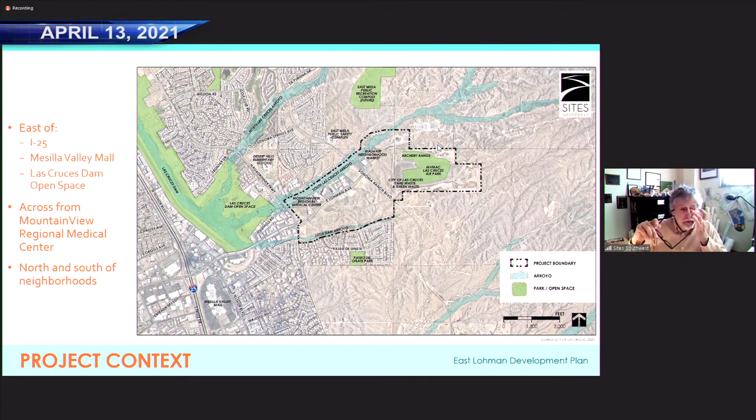We also took that we were going to be providing a buffer from existing communities in our land planning, and that along with the mix of residential uses, we'll also provide a mixed use in the entire area for not just residential uses, but other land uses such as retail, commercial, and health-related improvements.

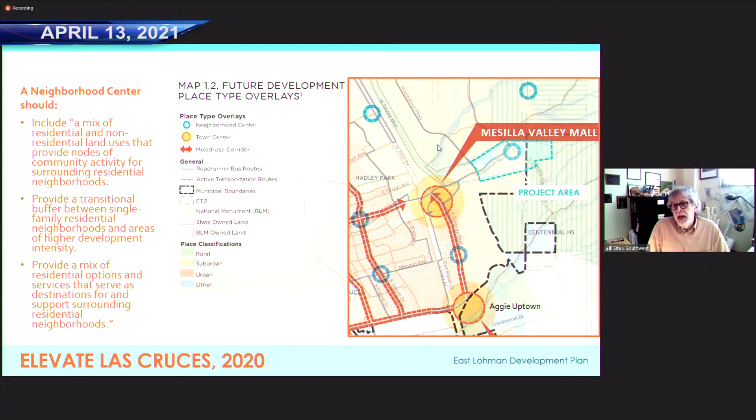And it creates a real live, work, and shop environment with a mix of land uses. We've also taken that to heart as well in our planning.

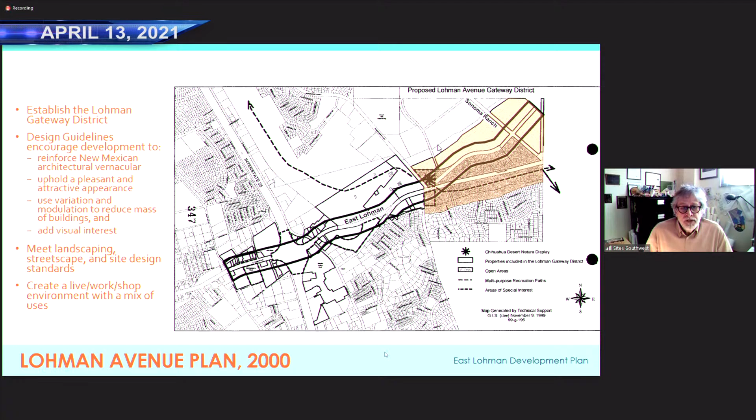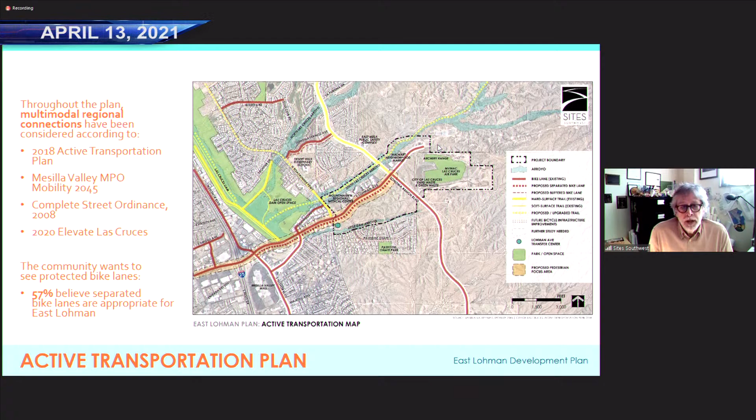Another thing we took from the active transportation planning that the city has already done is that 57% of the people appreciate bike lanes and want bike lanes on East Lohman. So we took that to heart as well in our planning efforts.

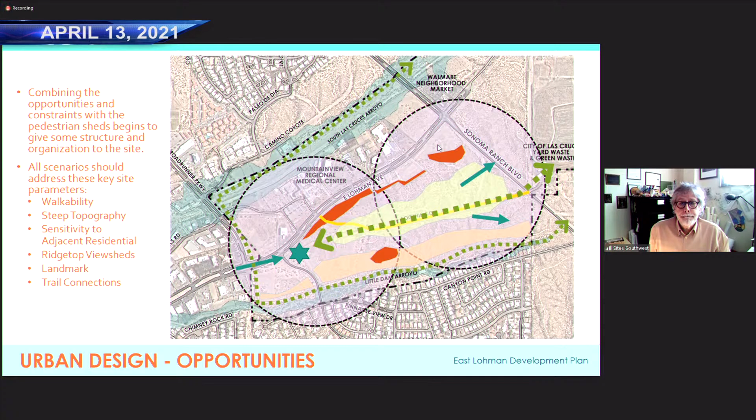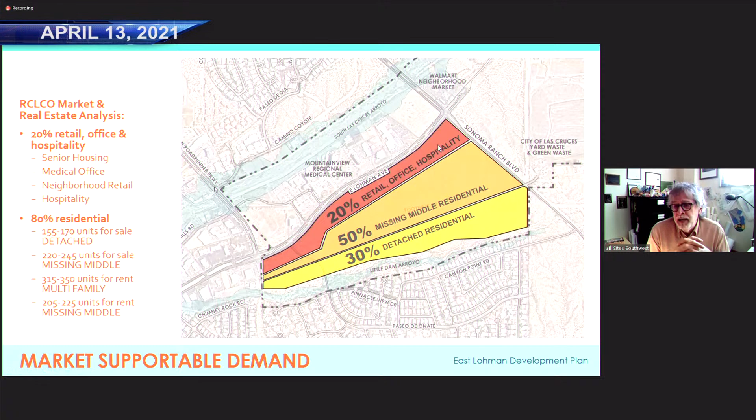So now I'm going to turn it over to Danny, and she is going to describe the community engagement that we've had so far on the project. Danny? Yeah, thank you, George.

Appreciate that. So in addition to conducting these analyses— excuse me, Danny, I know he introduced you, but can you just state your name? You just need to say your name, you don't have to say who you're with, just your name. By all means, I'm Danny Wilson.

It is really a joy to be here this afternoon presenting this plan, and really excited to build on what we've already engaged, which I'll summarize briefly here. We wanted to make sure that the East Lohman plan is a plan that is for and by the community, and that their goals and needs are really embedded into the outcome that you'll see today.

To summarize some of those pieces of engagement so far: back in August, we had several stakeholder meetings with key folks from the area, including businesses and realtors, developers, economic development representatives, and neighbors. This culminated, after we conducted the existing conditions analysis, with a work session held with City Council in November.

Building on this, it segued nicely into a community charrette that we held in December over the course of 3 days, finalized with 3 shared plans on the 4th day in January. Also happening concurrently, we launched our project website, planeastlohman.com, where we share regular updates with the public about plan development and ways folks could engage. As we move further along in the process, we'll share updated plans there as well.

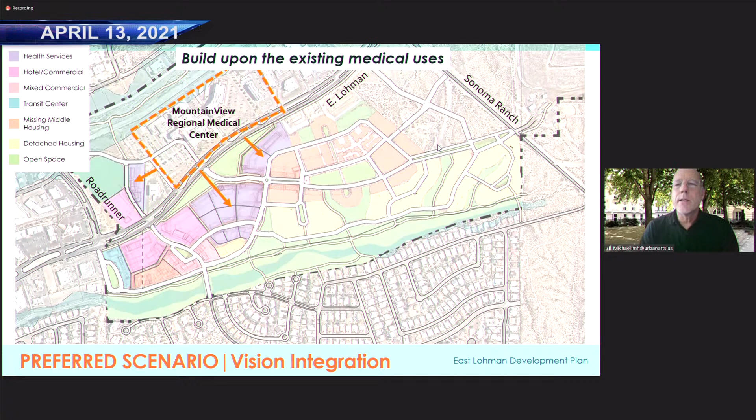Next. We've really focused on housing options, the missing middle and some detached residential, thinking that the higher density housing could go on top of the ridge or the mesa, if you will, and then we would transition to smaller scale as we move towards the neighborhood to the south.

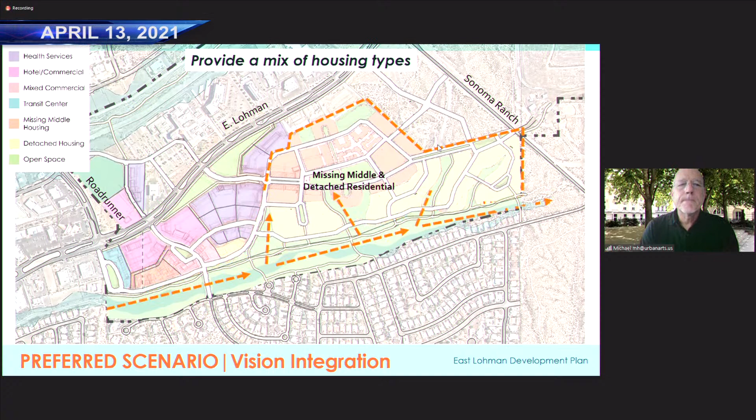Next. And then incorporating the natural environment, so utilizing the arroyo and extending it up into the plan was very important. And you'll see that we've sketched in some trail networks that can be used. So you could actually be on a bike in the arroyo and bike or walk right into the neighborhood and connect through it.

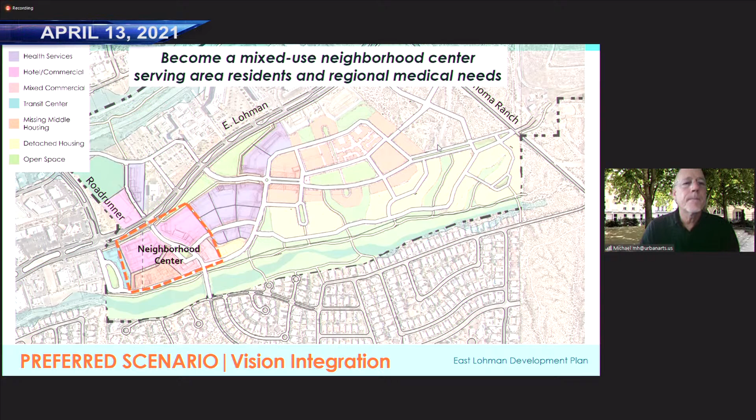Moving up to the east and north, you'll see again the medical uses there. And we also had in some of the other plans this idea of a terraced gateway, which we think is really important. Instead of cutting into the hillside, we're proposing a nice landscaped entrance drive that would go up to the top of the hill, with most of the development sitting up there, looking down on Lohman, which I think would be really nice.

So we don't think there's enough retail to do blocks and blocks of mixed use intensive development. But we're thinking if we could get one really nice urban block that maybe has some sandwich places and restaurants on the ground floor and something else above, that would be really nice, and it hooks into the green space.

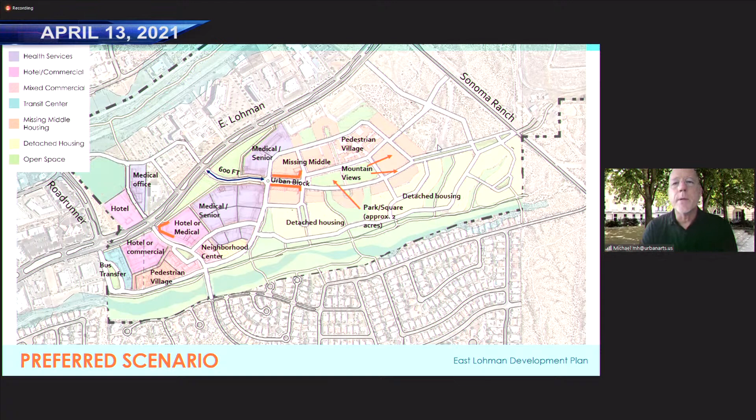Some mixed use or mixed commercial. We really concentrated the commercial down on Oñate and the corner of Oñate and Lohman, but there's also potential at the large site up at the northeast corner that could have some of this commercial activity. Again, the transit center is there. The missing middle housing and the detached housing are in the orange and yellow, and of course plenty of open space to tie it all together.

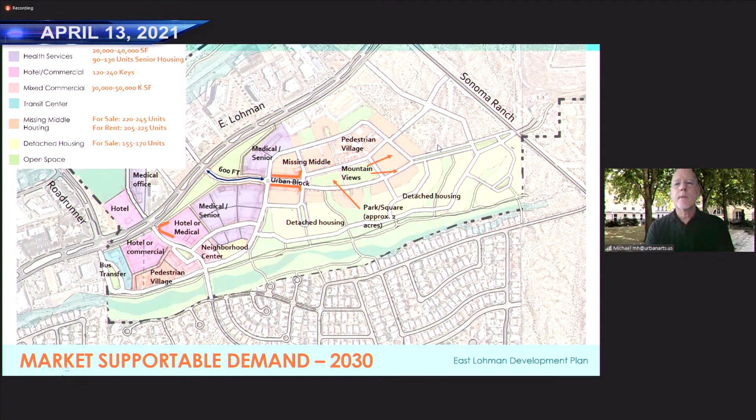If you remember the 9 big ideas, we had 3 big ideas per plan, and since everybody liked all of those ideas, we were tasked with combining those 9 into this plan. I think we've done a pretty good job of taking the ideas that people liked and finding a place for them in this new plan. Everything from the neighborhood center to the terraced entry to the focus on health and missing middle, all of those elements we can incorporate into this final version.

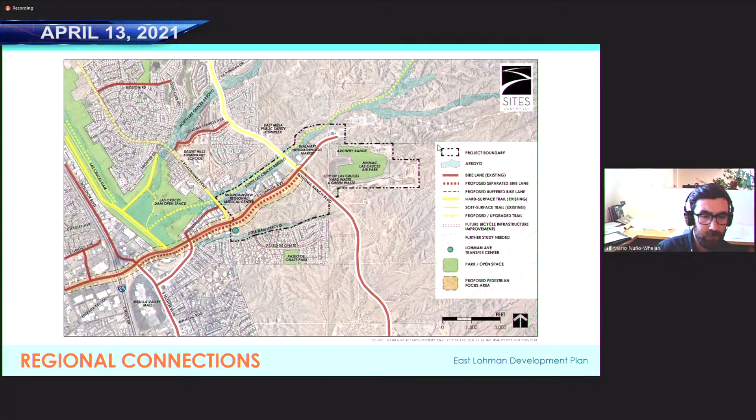Zooming in, this shows an overlay of the street network and the active transportation network we're envisioning for the East Lohman area. Along East Lohman you'd have separated bike lanes, and coming along Paseo de Oñate, which goes down into the Canyon Point community, proposed bike lanes along there, and then that central corridor running right through the site also having bike lanes.

This can be a range of options, from very naturalistic bike path type trails along the arroyo to the south, using the existing arroyos as open space, and providing trail networks that really connect both the community to the south and residents and users within the East Lohman area to the central and commercial corridors.

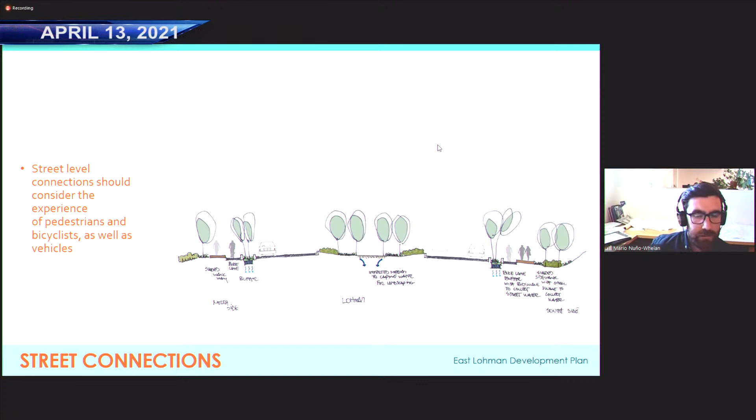This builds on a growing trend of folks having a growing appetite for transit and alternative transportation options, and maybe less attachment to personal cars and needing to drive everywhere — thinking about autonomous vehicles and small shuttles within the site, as well as e-scooters, shared bikes, and e-bikes.

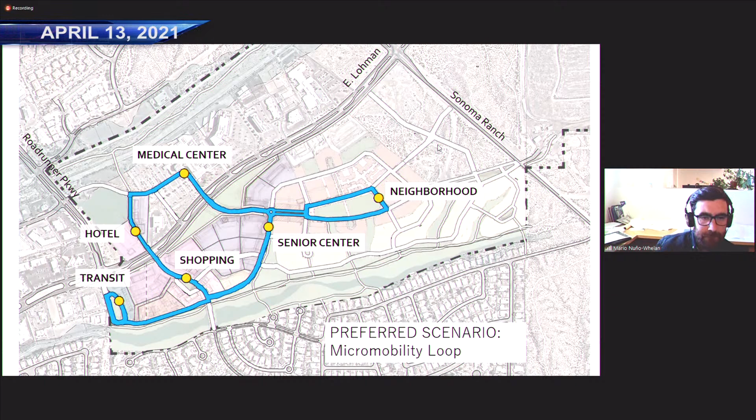The idea with this is the micro mobility loops can expand as development expands within the site. So as things move northward, or as the plan grows, extending that loop to include Walmart and the medical offices north and east of the existing medical center, and future shopping areas along Sonoma Ranch.

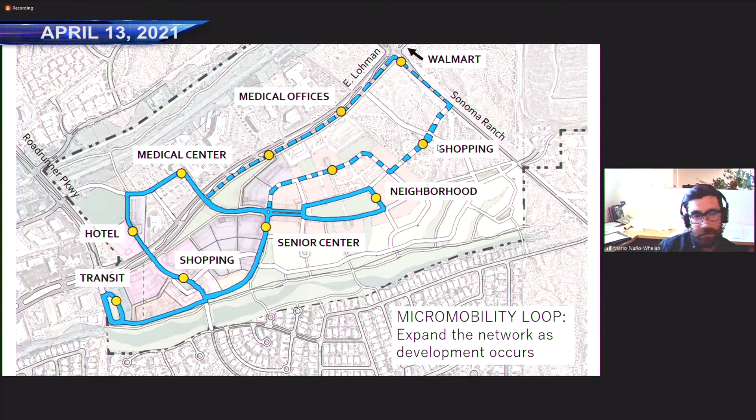Lastly, I wanted to highlight the layer of open space areas in the plan. Going through the different draft scenarios and getting feedback, a lot of people really liked having density on one hand, but loved what the conservation plan did in terms of building around existing drainages and preserving the healthy landscapes. We tried to cluster the detached housing around these arroyos and build communities that responded to that, allowing trail networks to go in there.

You can see the largest arroyo down to the south, and various green spaces using the smaller drainages that come down from Foothills Drive, the central gathering park of the mixed use area. Folks really responded to the terraced entry and using that as a mix of green spaces - this could be pocket parks or small gathering areas that medical center staff and visitors could use. The last one is the existing drainage basin that runs along Roadrunner, taking that further into a shared green space.

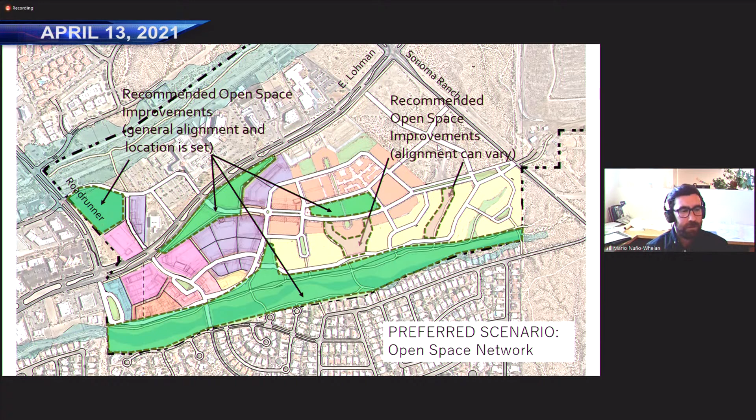And I will hand it over to Jay.

Thanks, Mario. My name is Jay Narayana. I'm going to be presenting the zoning framework. We have this great vision for this development on East Lohman. A lot of the property is owned by the city, so the city does have some control, but we don't want this vision to just remain on the shelf. We want to make sure it can be implemented through a zoning framework based on leveraging the market potential, allowing flexibility, but balancing the need for predictability, because as the city sells or disposes of property, you want everyone playing from the same blueprint, with value added for everyone building on an overall vision.

A lot of what you have around here is very familiar - it's what's on the left, where buildings are set back and parking is in front along the roadways. The vision we want to achieve is what's on the right, where buildings are closer to the street and parking is behind. So how do we get from what's on the left to the right? It's really about reframing how we look at zoning and the form of development that's implemented.

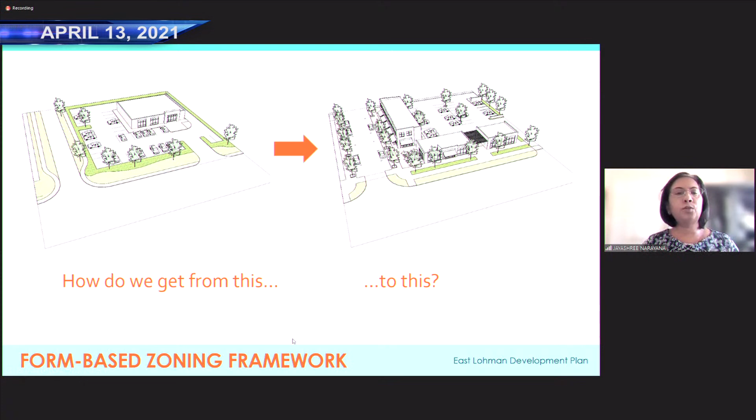On the left, you have single-use buildings set back with parking along the roadways - mainly auto-oriented. Think about East Lohman right now - it's fairly auto-oriented. If you're walking on Lohman, most people probably think your car broke down and you have no business walking on the roadway. We want to make it easier to walk and attract multiple modes - the great investment of the micromobility loop and the trails - the city has a big investment in this property and the need to realize the potential for many uses and make sure that's implemented.

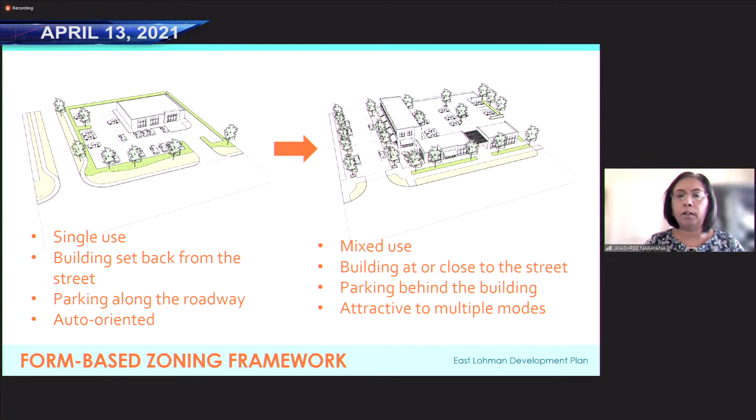The idea of zoning here is more of a form-based code type framework that establishes different character areas or zones with different forms. The whole East Lohman district is one district, but it's not a one-size-fits-all zoning tool. You have different nuances of use types and intensities of development based on where you are.

The neighborhood center may take a different feel, and the neighborhood with detached housing may look and feel different. We want to make sure there is street connectivity thought through, so that as development happens, you end up with a connected street and pedestrian network. There's a lot of detail in our vision, so we want to make sure that's translated through the zoning tool.

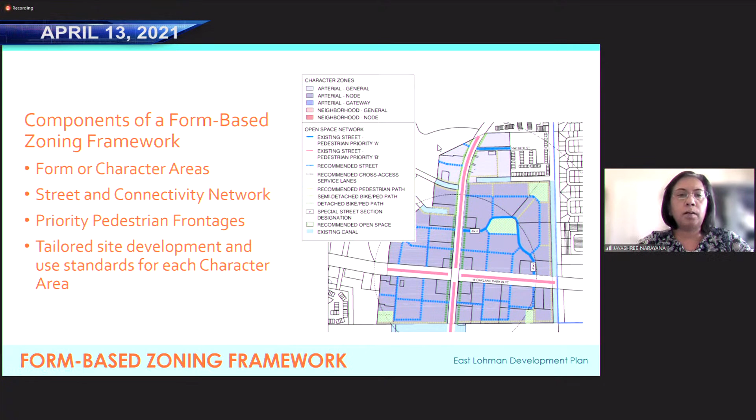This is the preferred scenario - think about how we'd go about creating the zoning framework for it. One area is the civic zone, which we're treating a bit differently because it's a unique use - a bus transfer station, which is a public use. We know there are special needs for circulation for the buses, and connectivity needed with the light at Roadrunner.

Then the Lohman Gateway. The reason we are identifying this as a different character area is because we want to make sure that the intensity of the development—maybe this is where we have the highest intensity, maybe 5-story because it's lower down on the hill. We want this intersection to create an interesting landmark for East Lohman, so people know they're in a special area. So you'd want a mix of uses, including hotel, commercial, health-related, mixed use, and residential.

So this would be the kinds of development we're envisioning. When you translate this into a zoning tool, we'd want the design standards to implement some version of this. It won't be exactly like this, but we want the elements here to be reflected.

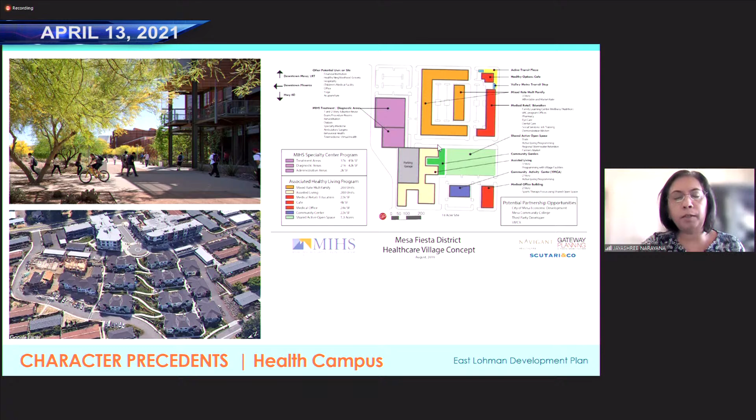Again, it could include some institutional uses, but also residential. These are some images of what that kind of development could look like.

It may be height standards for 3-story on top of the mesa, the highest point of the site, and then maybe smaller scale commercial development. When Mike described the idea of restaurants and a more urban block closer to the health campus, that may be a location where you focus ground floor commercial uses in your zoning. This could be the image of what that village neighborhood could look like—a mix of missing middle and commercial uses.

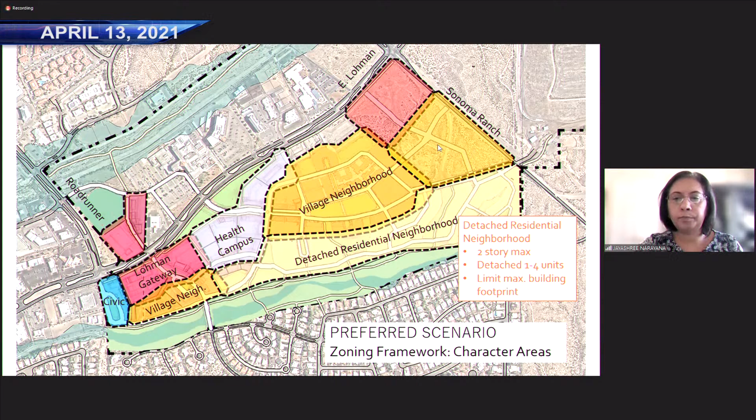And the last would be the detached residential neighborhood. The idea is to match the scale of the residential neighborhood, which is single family, but allow a little more gentle density—1 to 4 units, duplexes, triplexes—while still keeping with the scale of the neighborhood. Maybe 2-story maximum, some larger lots, some smaller lots, maybe accessory dwelling units, really having a mix that's more compatible with the neighborhood to the south. This would be the image of what the standards would implement.

With that, I'll hand it over to Mike to talk about the next steps. Thank you. That's me. Okay, next.

Michael Houston again. I think we have just two slides. What we did is, when talking about implementation, it helps to break out the plan into its two basic components. In urban planning, we think of the civic realm or public realm, which includes streets, open spaces, and infrastructure, and then the private realm, which is development within private property boundaries. So to help with implementation, we've got one slide highlighting the different components of the civic realm, which we've numbered.

So the next step we recommend is that you think about doing some very preliminary engineering and study of these different infrastructure components. Probably the most important would be the East Lohman corridor, where you look at the separated bike lanes identified in the earlier plans and the feasibility of this kind of terraced entryway. You don't want to go directly into full-blown engineering—you just need to do enough to get a handle on the feasibility and the cost. Knowing the cost, getting an estimate, is a big step toward getting it implemented.

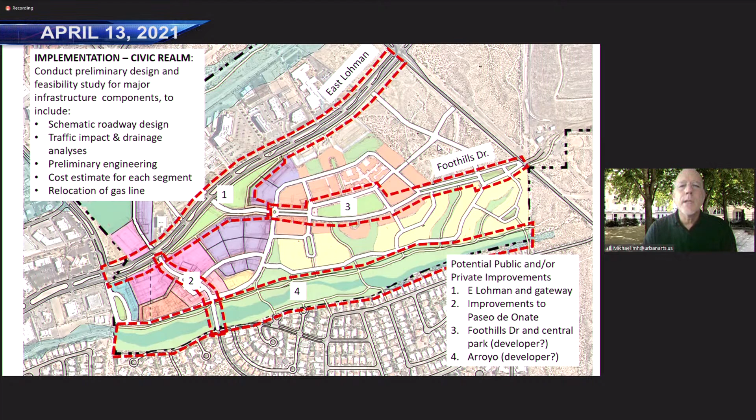Within the private realm, this goes back to what Jay talked about. It's putting in place a zoning code or plan development, some sort of performance criteria, so that as you sell off or lease portions of the site, there are guidelines on not only how buildings look and what materials they have, but also street and trail connectivity. In conventional development, a developer often only looks at their own site and doesn't connect to their neighbors, so that would be a big component of the code, requiring performance criteria so that one development connects to another.

When we looked at the preferred plan earlier, you saw little lines, especially in the purple areas. Those are just notional ideas of how lots could start being partitioned off, into maybe 2-acre or 1-acre segments. You might have a variety of sizes, but we want to start designing streets based on real criteria of what a building developer might be looking for.

There's one more slide, and I was going to take that one, Mike. Okay, this is the last slide everyone. We just wanted to give you a quick rundown of next steps. That's George Radnovich again, with Sites Southwest.

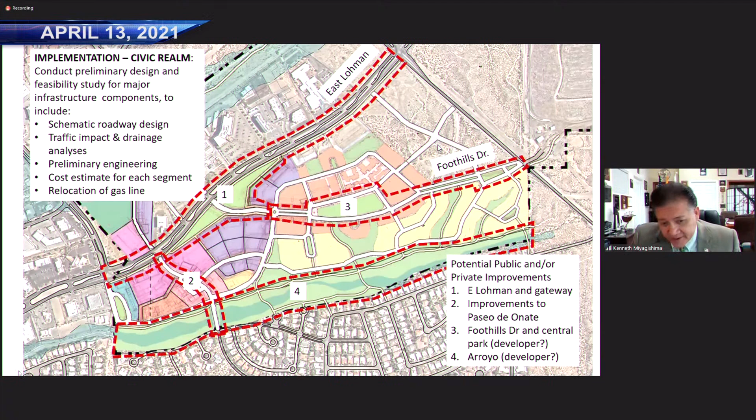Okay, thanks George. Before we go to council and P&Z, can you go back a couple slides? I just want to clarify a couple things, please. One more—there you go, right there. Oh no, can you go back again? There you go. Okay, so on number 4...

The north side of Lohman, I think you have it designated as BLM property. Immediately west of that, that used to be a landfill also. Were you aware of that? We were. Okay, so you feel that item 4 could still be used, because that side, I have to admit, versus the other side where the city cleaned up, is really, really bad—there's a lot of stuff there. That's why I don't think we cleaned it; it was just a lot.

So do you feel that's still buildable? It would have to be mitigated, the landfill would have to be mitigated in order to do that, Mayor. But yes, it could be. And the other side is, as you know, a lot more buildable. One of the past plans, I believe the East Lohman plan, designated that number 4 on the north—and I think you knew this when you designated it that way—as a community garden and a desert landscape garden. So it could be that. The reason we showed a hotel on that site, if the market required it, was because this hotel, wherever it ends up, would be close to the medical center and be there for people visiting loved ones.

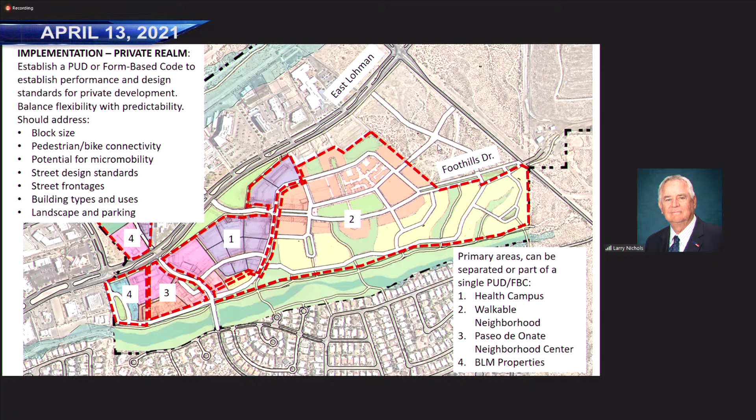Thank you, Larry. Mayor and city councilors, the coding does not have specific requirements for complete streets. That's a policy. But what's unique about this particular property are a couple of points: one, it is owned by the city, so as development goes forward, you can put requirements on how you would like to see it. Two, it's currently zoned planned unit development without basically a holding zone or open space. So as you go forward and entitle this property, you could incorporate those standards and have the requirements as called out in the plan for pedestrian, bicycles, transit, micro transit elements in your actual zoning or development standards for this property. That was David Weir speaking. Oh, thank you, no problem.

Thank you, I appreciate that. I also wanted to know, I like the idea of making sure if we do have any community centers, those types of gathering spaces, open parks, if there's ability to have that middle, the missing middle, or if we're able to do any sort of affordable housing, to have those connected together so that individuals are able to walk easily to those areas, especially if we're going to have senior sites too.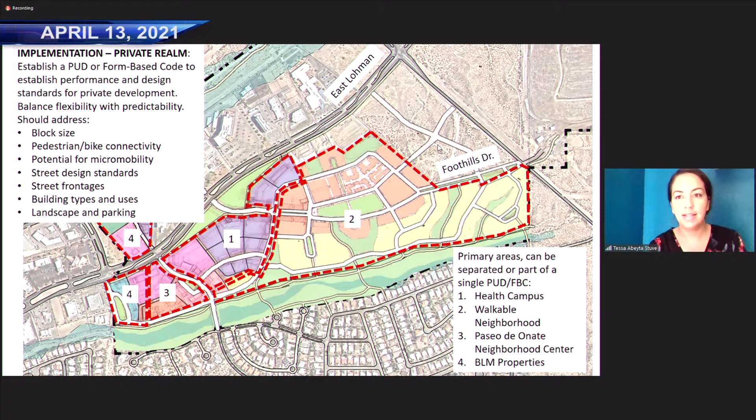Thanks, okay, thank you. Councilor Sorg. Yeah, thank you, Mr. Mayor, and thank you to Southwest for the presentation. It looks like you've done a very good job. I think we can make this a 21st century city here, 21st century planning, which is something I'm looking forward to, having all these aspects such as stormwater capture, missing middle housing, affordable housing.

In fact, we should have a target of 20% of all the housing in this development being affordable housing. Habitat preservation rather, the active transportation, including TOD, transit-oriented development, form-based code. I'm so glad to see that here too.

I was looking for the connection for the existing neighborhoods, the ones to the south, for bike and foot traffic, and I see there are some nice connections you have put in there. But also, I hope we can squeeze in other neighborhoods to the north and to the west or southwest of this development, to get a connection somehow to this development.

A couple of things came to mind that weren't mentioned. We talked about in the public input that we held, possibly having a pedestrian bridge to go across Lohman to the hospital and the medical offices there, where people wouldn't have to fight traffic to get across, especially in cases where people might be in wheelchairs or so forth.

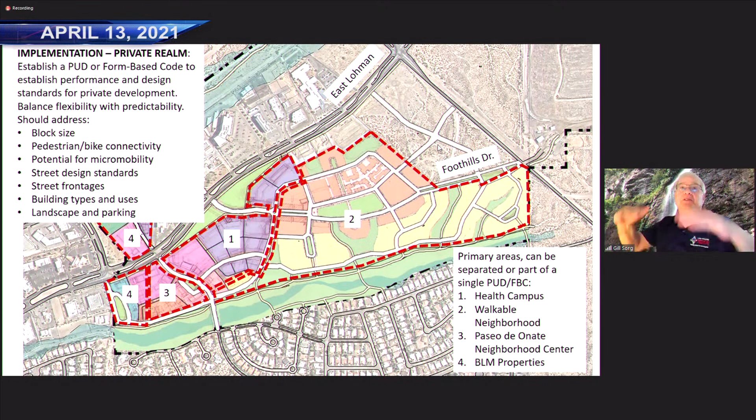And then when you showed the slide that had those steps kind of contoured up the side of a hill, it brought to mind a street in San Francisco called Lombard Street. I would think it'd be awfully cool if we could put a Lombard Street in there on that hill. We could have our own Las Cruces Lombard Street.

But there is one more unique opportunity in this development that would be like no other development, at least not in Las Cruces, maybe in a lot of places across the southwestern nation. We could have this be a net zero energy community for all the buildings built there. To give you an idea, a net zero home is one that creates all the energy it uses. In short, it means there is no electric bill. The net zero home means that when you take the amount of energy a home creates, then subtract the amount of energy the home uses, it equals zero.

We could make this whole community a net zero community where we would not be putting any greenhouse gases into the air. We want houses that are all wired for total electric use, wired for solar PV installed on top of the buildings or anywhere else it can be, and we want all the buildings to have outlets for electric vehicles. I think this would be quite unique, and I'd encourage the council, the staff, and the mayor to support a net zero community.

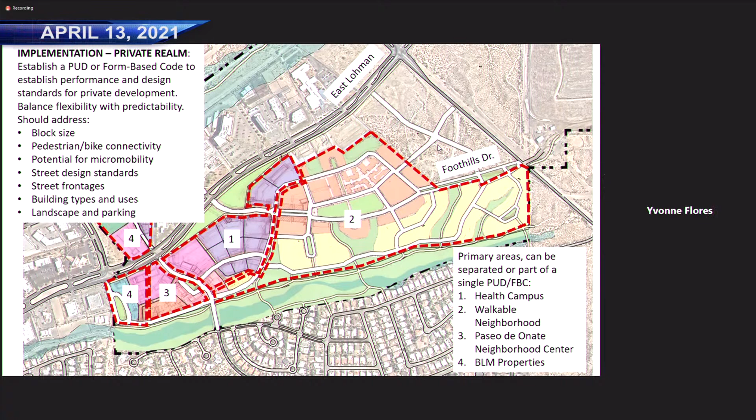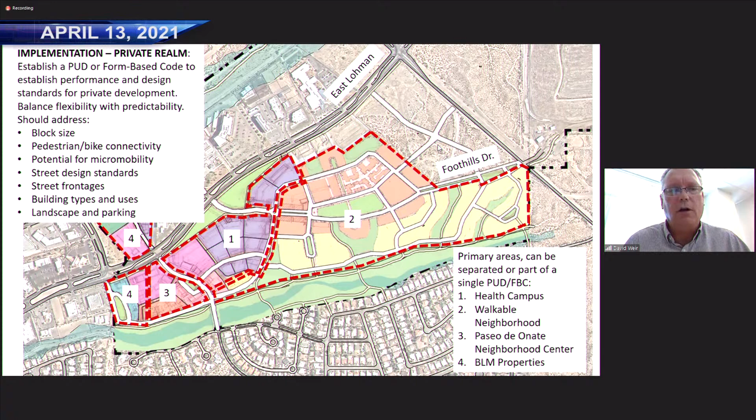Mayor and City Council, I'm kind of curious how the name Foothills Drive got put in there. This is David Weir again. That's a remnant. The old Foothills Drive used to go through this property out to another landfill site, so all the maps still identify it as the right-of-way from Foothills, but that right-of-way has been redirected and actually heads north of Lohman and comes out on Roadrunner Parkway. So we'll correct that as the plan is updated and finalized. Okay, I assumed you would. I just had to bring it out so we all know.

Getting back to net zero buildings, you can make net zero buildings even on affordable housing. When I was visiting Austin, Texas for a National League of Cities convention, we were taken to a net zero development of 3 or 4 units, I think they were duplexes, and they were all net zero and all affordable housing. So it can be done, and therefore I'm encouraging our council to support a net zero community.

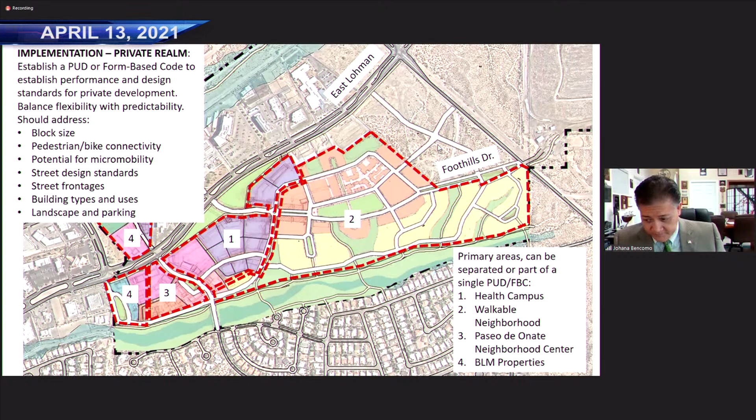Thank you, Mayor, and thanks everyone. It was great to see the presentation again. They were at our housing PRC either last month or the month before. Zoom time is weird, I'm not sure. But I did just have a couple questions.

I'm curious in terms of the conversation we just had yesterday at our work session with the water impact fees and that changing, the split being 50-50, that obviously will impact this development, right? Is there any room for potential waivers, particularly for the affordable housing development that could go here, that could be an incentive for developers to want to build more of those affordable housing units, more of those missing middle units?

Councilor, let me just chime in on this one. So one of the things we've been exploring is if we were to enter into a public-private partnership with a developer.

Obviously, one of the things the developer does is put in the infrastructure, the sewer system, the water system, all the different lines. After they get it done, they give it to the city, but they first pay for it up front. So what we may want to look at is: we put in that infrastructure, that's our contribution, in return for them to provide so much affordable housing, because that's that much less money they're going to have to put in. So that may be a way to do this.

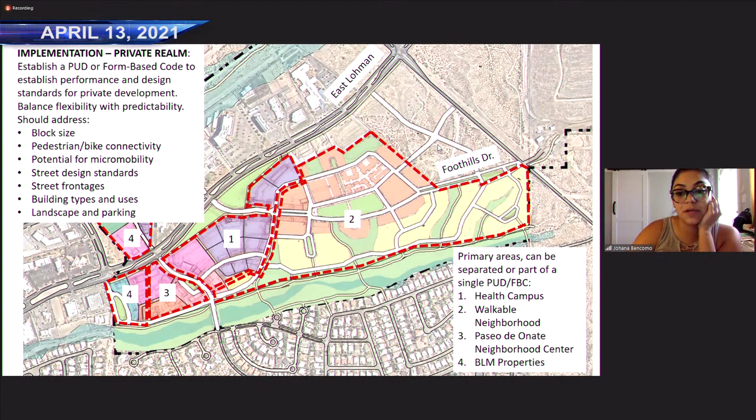Yeah, my last question is, I don't know if Natalie is on, or even our PIO, but I think it's really important that we start thinking now about messaging strategies. I think there's a lot of misinformation and misunderstanding about affordable housing and those kinds of projects from a big part of our community. I'm afraid that particularly in this area it might come up, folks pushing against this kind of development. So I think it's important that we start thinking about messaging strategies that lift up the need for this, that lift up how thoughtful this process is, and why affordable housing developments are necessary. I've been talking to Natalie in our housing PRC about this for a while, but I want to make sure - I don't know if Southwest Consultants provide any of those kinds of things. I just think it's an important piece to consider for the future.

No, Councilor, you bring up a good point, and I think maybe we'll change the name of it from affordable housing to just mixed income housing. I want to use the example of Southwest Airlines and those free tickets. A long time ago I used to get some free tickets, and when you go on a flight, there's going to be some who pay full price, some who get great discounts, and some who fly for free because they have coupons.

But the plane is a brand new plane. That basically, circling back to what I was saying about that public-private partnership, these are beautiful structures. Some will pay the regular price, and some will pay a very discounted price, because that's the agreement the developer takes with the city if we provide this type of infrastructure. You're talking hundreds of thousands of dollars they won't have to pay. In return, the bottom line - they're going to be looking at the bottom line. When they build out a project they want a bottom line, but if we provide this, then their bottom line goes up. And then how it comes down.

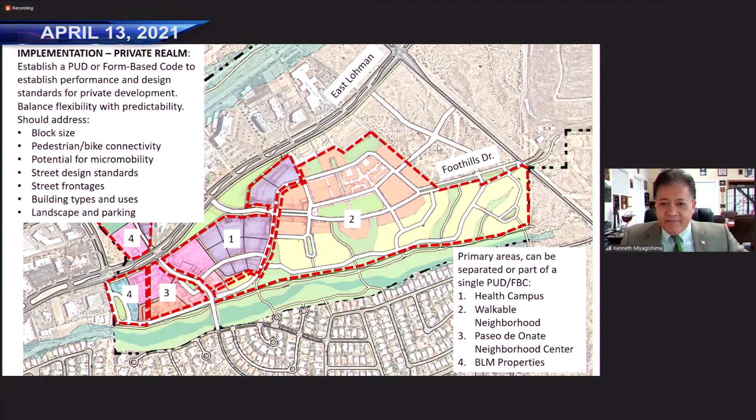So it comes back to where they first started - that's how they provide certain housing at certain income levels. But you're not going to know, because the outside's going to be great, everything's going to look good, and it's just going to be that certain people get it for a little bit cheaper. And that's it. I think that's really the way to go. As a kid growing up here, there was a place near Lynn Middle School that you knew was 'that area,' and that's what we want to get away from. You just want to be able to go to an area where you don't know who lives there or how much they pay for rent. I think that's what you're getting at.

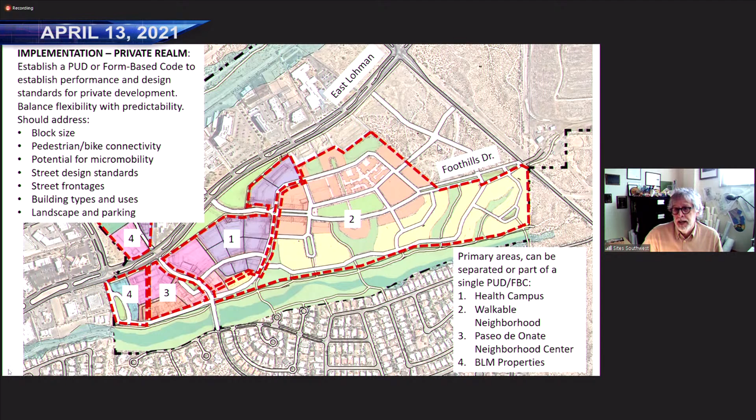Mayor and Council, we did consider mixed affordability in the housing, and we've heard that repeatedly from the public and from Council and Planning and Zoning. That is part of the planning effort we've gone through, and it's also included in the market study. RCLCO identified it as an important need when they did the market study for us. So we have it planned in as mixed income housing, as the mayor said. I just wanted to assure you of that.

Thank you. And so that was George talking, right? Oh, sorry, yes, George Radnovich. Thanks, Mayor, thank you, Council.

No, it's okay, and yes, I think this is really great. I think my point is more in terms of how are we communicating and messaging this to the community, so that we're getting rid of some of those old school tropes and myths about what affordable housing is. I think that's a really good point, Councilor.

Thank you. I think we have some airline props at our movie studio. Maybe you guys can do a movie and you won't know who pays what, and that's how you kind of translate it. Before I get to Commissioner Thomas, we have Larry Nichols with his hand up. Larry? But we don't have a studio anymore.

Okay, thank you, Mayor. Larry Nichols, for the record. Councilor Bencomo, I would like to answer a couple of your comments. We have been really heavily engaged in talking about affordable housing, particularly the last couple of years. One of the challenges I presented to Sites Southwest when we first initiated this project was: give us a master plan that offers a point of difference. Let's not repeat everything that's maybe been done before, because it didn't really address affordable housing. I think the mayor had a very good point when he used the term mixed income housing, because that's really what we need to head towards.

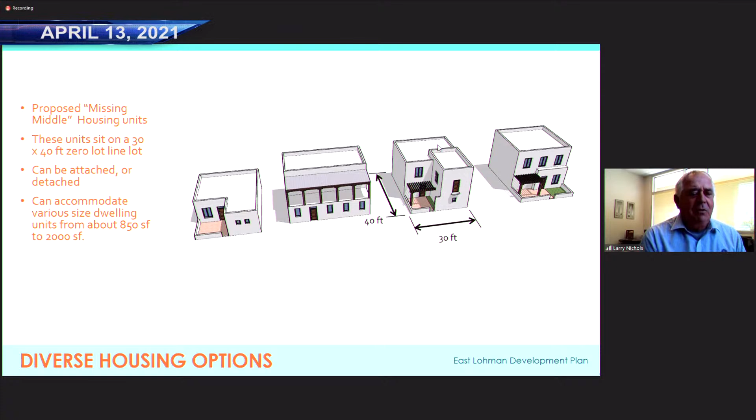Thank you, Mayor. Thanks, Larry. Councilor Bencomo, was that it?

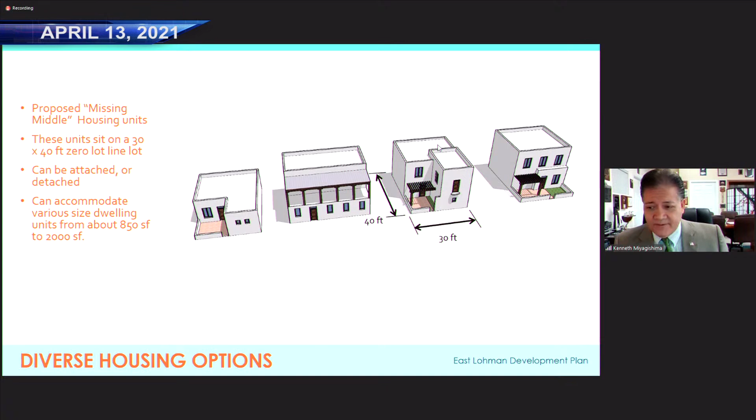Yeah, before I get to Commissioner Thomas, I just want to take a quick moment - and I know they're not listening - but former Albuquerque Mayor R.J. Berry, and I call him the dean of the developers, Eddie Benz. If it wasn't for the fact that Eddie was willing to sell us some land for the Veterans Park, and Mayor R.J. Berry was able to do a little swap and then threw this land in here, which we essentially paid like $500,000 for - I have to tell you, that land went in 1999 for $10 a square foot. There's 110 acres, that puts us at over $50 million in value for a fraction of that. So just wanted to send those two gentlemen thanks.

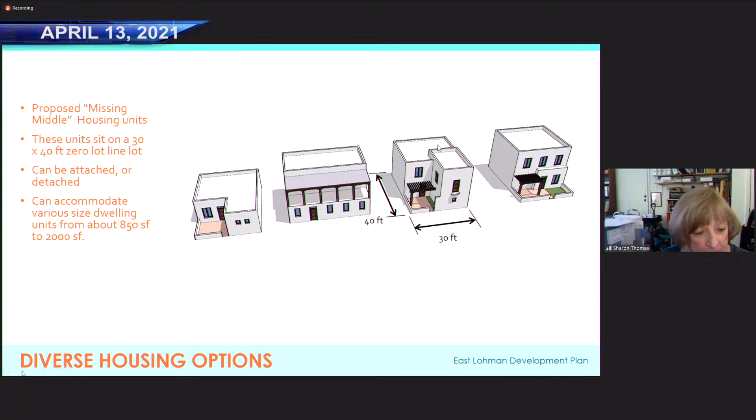I'm also concerned about the affordable housing. I don't know if you can go back to that slide, but it looks like the missing middle is over on one part and the single family is someplace else. Can we not have some missing middle integrated with the single family? I've seen that in other places. And I don't see anything actually about affordable housing.

I think what Councilor Sorg said, a percentage that gets integrated across the area. I really like, as the mayor's talking about, to see the missing middle and the affordable spread out across the whole development, so that you can't say, oh, that part over there is where those people live. I'm not really seeing that. Am I missing something here, or?

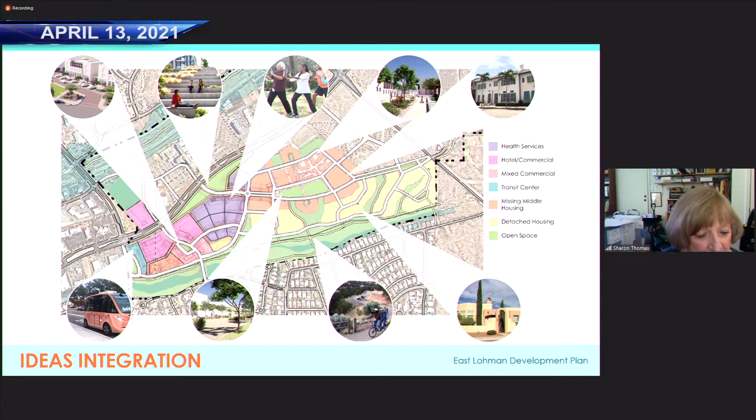I might be able to answer that. This is Michael Houston again. So a couple of things. One, as Jay mentioned, even in that yellow area, we're proposing that multiple units be permitted within a single lot, but we are suggesting that the scale of those buildings still look more like a detached structure of maybe 2 stories maximum, but it could still be a duplex, triplex. It's still basically a missing middle typology, but we're showing that the scale of it is going to be more compatible with the neighborhood to the south.

So even though there's a difference between the yellow area and the orange, those things could be in a more detailed plan, a more nuanced difference. So there's going to be more interplay between the two. As to how you implement that, I think that would come in when you get into the zoning aspect. If you do a form-based code or a plan development and you establish those performance criteria, that could be one of the components. Right now, we're focusing more on the open space and the street network and these transitions, but that's kind of an element of the performance criteria.

And in the best case scenario, you would have a mix. You'd have market rate next to affordable housing, and you really wouldn't know the difference. That was the whole idea of the pedestrian neighborhood.

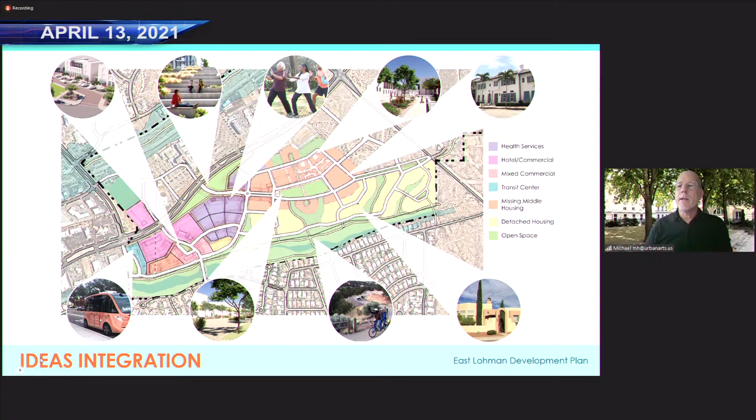Another thing I was going to mention about the pedestrian neighborhood, since we were looking at that slide that had the 4 housing types, is that's a concept we kind of invented for this project, taking inspiration from other projects, but we haven't done this exact idea. We do think this concept could be tried out maybe in other locations in the city. So if you have land near downtown or within the city limits that you want to do a pilot project and try out this housing type, it might be a good way to start before you commit to doing a larger area. Hope that helped.

Also, I'd like to add. Yeah, go ahead. I just wanted to add that I think you're right, we haven't shown on any of these slides. Excuse me, who's speaking?

I'm sorry, this is George Radnovich at Sites Southwest. Thank you, Mayor, that'll be the last time you have to prompt me. I'm going to start fining you a dollar. It's happened before.

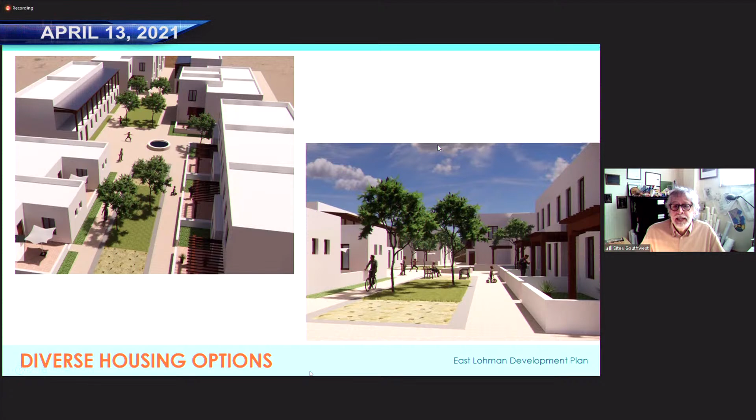Commissioner Thomas, I think you're right. We haven't posted on any of our drawings for the presentation. However, we have included it in the report, a mixed income or an affordable housing component. And I think we really need to add that to the presentation and to the drawings to make sure that it's covered. So thank you for pointing that out.

Yeah, I think that's what I would ask going forward, if you could be a little more specific about some of those ideas, because that's what I hear people saying. They want to see this mixed and not be able to tell what's the affordable and what's not. I'm a fan of the Holiday development in Boulder because my sister-in-law's sister lives there, so I'm familiar with that development. You really, really cannot tell, even though 30% of it is affordable housing. You can't pick it out. And I hope we can do that in this.

Also, I didn't hear anything about high-speed internet and all. That's all going to be available here, right?

We didn't get to that level of detail in the plan at this point, but high-speed internet would be available, I believe. We'll have to check that with our city partners, and we can definitely include that in the plan as well. It's part of all planning at this point.

That would be great. You know, even though we might be working our way out of this dilemma with COVID, we have more and more people working remotely, and they're going to probably continue to do so, a lot of them.

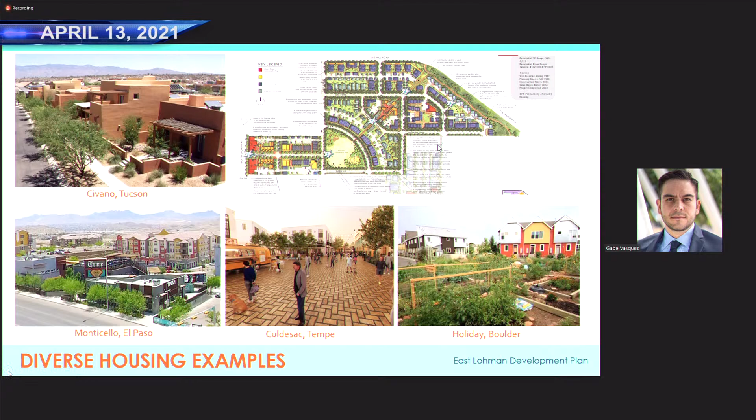It's a great place to develop, and Mayor, I agree with you on the public-private partnership opportunities. I think we want to maximize the amount of GRT that we can get out of this property, considering the investment that we just really hit the lottery on. Much credit to you as well for that foresight to get this piece of land here.

So taking off, perhaps on a much smaller scale, of what we've done with the Amador, what we were thinking about doing with the Doña Ana County Courthouse, this might be on a much larger scale, but I think we should definitely pursue that option as much as we can, and we retain a lot of the control of what happens there if we do that. So I want to say I support that.

In terms of the affordable housing piece of things here, I would say that the majority of our population in Las Cruces fits into the category of being someone who needs affordable housing. So I just want us to remind ourselves of that, in terms of our per capita household income.

Oftentimes the folks that are most vocal against affordable housing projects may be the most vocal, but they are in the minority. So we want to make sure we are serving the majority of our residents as much as we can in these types of developments, giving folks access in an affordable way to livable, walkable, bikeable, healthy communities, which is going to make us stand out from other communities.

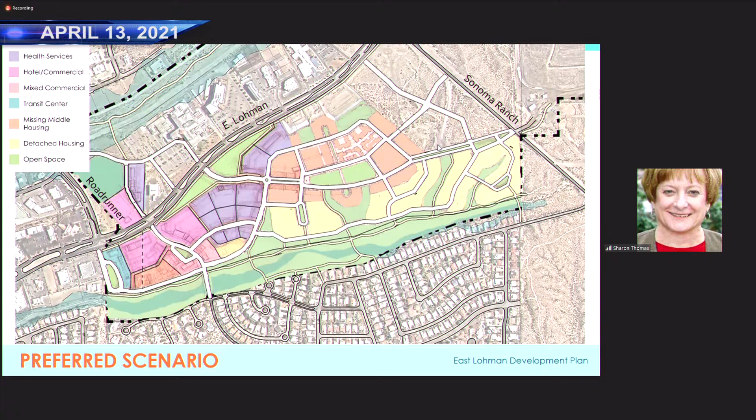I understand Adrienne Widmer is on the phone. Adrienne, if you're there, the question was: I received an email from a biology professor who wanted to know if we had discovered any artifacts when cleaning up the area, and if not, whether they could still have a chance, when we do further dirt work, to be available to check things out.

It would be called surveying, Mr. Mayor - they would survey it. Adrienne, are you there? Okay, so she's not there. Oh, there you are - go ahead. Adrienne? Hi there, I'm having some technical difficulties, could you repeat the last question?

I received an email from a professor at the university. He wanted to know if we discovered any artifacts when your department was cleaning up the area for remediation, and if not, whether they could still have a chance to look at further dirt whenever they do more movement of dirt - by that time it will probably be turned over to whoever's in charge of the development. But did you come across, were you aware of any artifacts while they were cleaning up the old landfill?

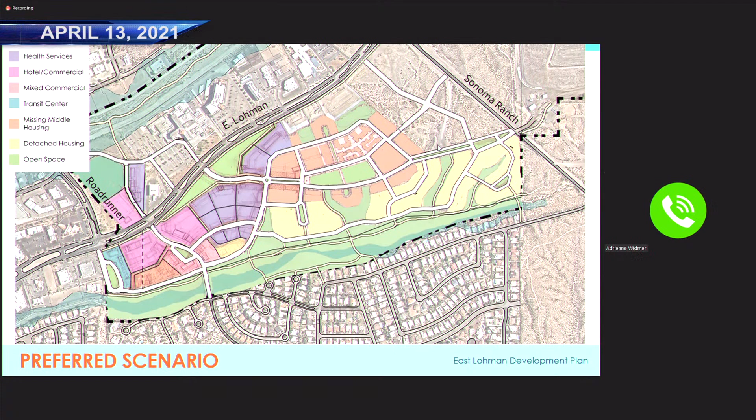Okay, George, does this conclude today's presentation? It does, Mayor - George Radnovich, Site Southwest - happy to answer any other questions or provide any other information you need. This was a really great session. I want to thank everybody for participating and for giving us great comments and direction, and I think we're right on track. We'll look forward to getting any public comments from those on the call.

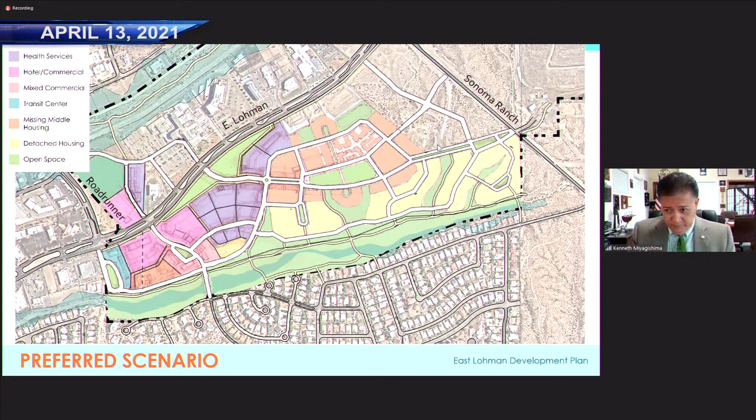And I thank the mayor and all of you councilors and commissioners, Councilor Flores, Gandara, Councilor Sorg, and everyone who has spoken to us. Looks like Mayor Pro Tem raised her hand. I did, Mayor - just lastly, is your website still active for this particular project?

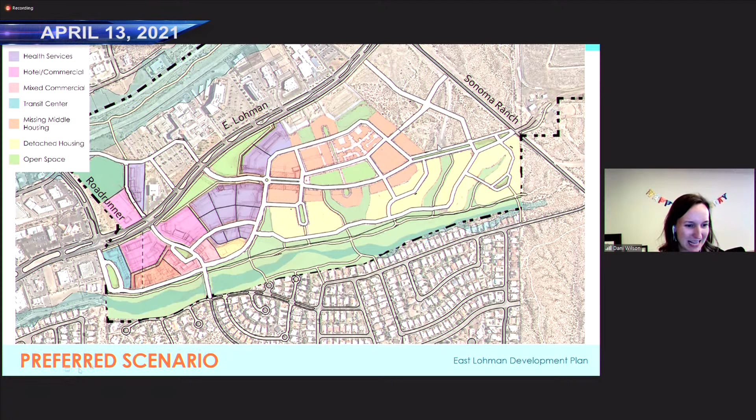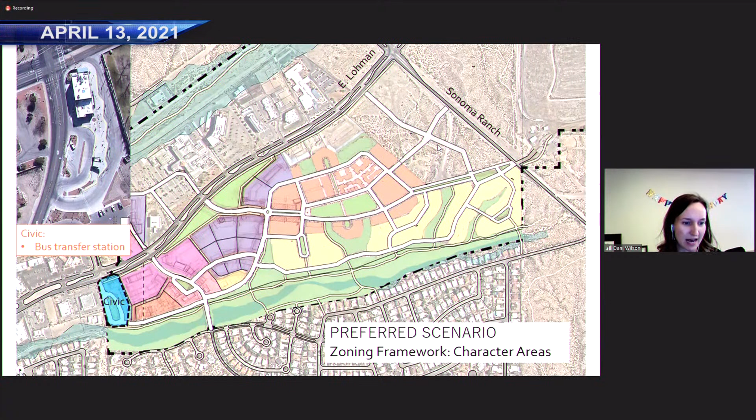George Radnovich with Site Southwest: Yes, it is, it's still the same location. Dani Wilson, Site Southwest: I was just going to jump to my last slide here. I plan to link to this recording once it's posted or available on YouTube, with an update on the project website. Even though the survey is closed, it will remain active as we publish the draft final plan once community development has had a chance to review it. And planeastlohman.com is that website.

Good, thank you. What was that, Dani? I didn't quite hear that. Sure thing - Dani Wilson - it is planeastlohman.com. Oh, thank you, all one word. Councilor Flores: thank you, George.